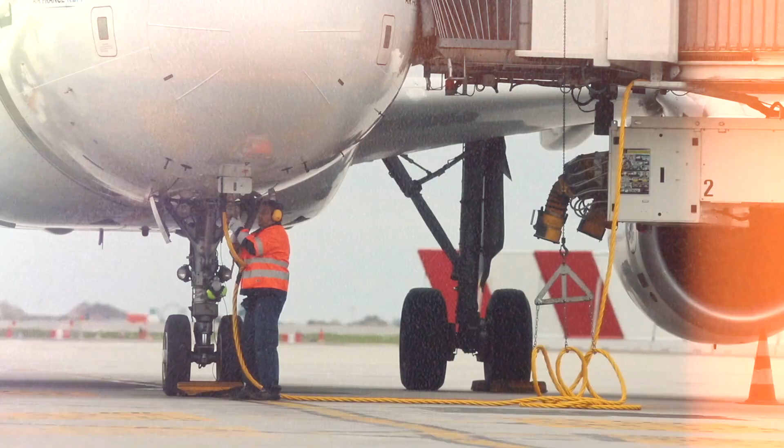Today, there is a rather urgent, double unsurvivable brewing crisis in the ever-evolving aviation industry. If these two serious problems are not resolved in the next 2 decades, the entire aviation industry would come to a halt and you can kiss flying anywhere bye-bye.

The first problem is the fact that planes' engines work on kerosene and there is only one clean, feasible alternative. Additionally, since kerosene is a crude oil byproduct, it is a major source of CO2 emissions, and the world is bound to run out of oil in less than 50 years.

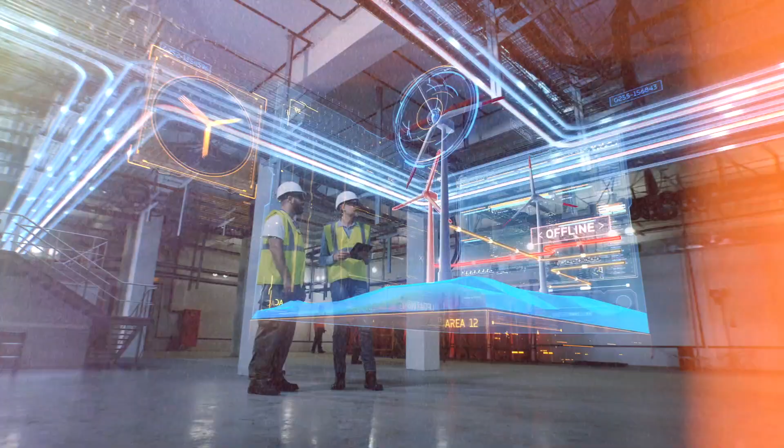This urgent matter called for an unprecedented giga project that extends across the globe to create an alternative, affordable, sustainable, clean source of energy to power passenger and cargo planes. What will save the day? Will it be batteries and solar panels on top of planes, or something more intriguing like green hydrogen? The answer will surprise even the experts.

The aviation industry currently supports nearly 90 million jobs worldwide, either directly within the industry or through the immense industry supply chain. Half of that number is associated with the tourism industry, which is immense and only possible due to the modern advancements in the aviation sector.

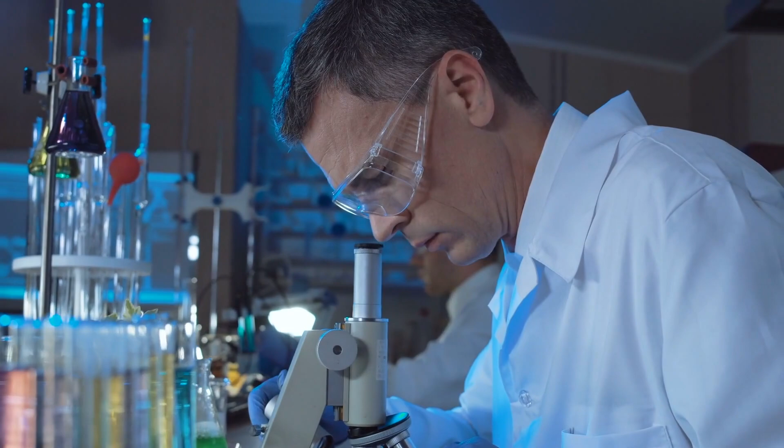And just like we have today green tourism, the aviation industry is also under immense pressure to become green too, since planes produce a little more than 3% of the total global CO2 emission among other pollutants. However, unlike the car industry, which is going electric, the aviation industry is the only sector on the planet that is bound to keep contributing and increasing greenhouse emissions and pollution in general because, as we explained earlier, there is only one alternative to kerosene and it is not batteries.

The reason for this dilemma is simple. Planes require large amounts of energy to take off and maintain speed. In a nutshell, to make a 100-passenger plane fly on batteries from LA to New York, the entire plane has to be filled with large batteries, leaving only space for the pilots. The situation is even worse for larger planes. So batteries are out of the question.

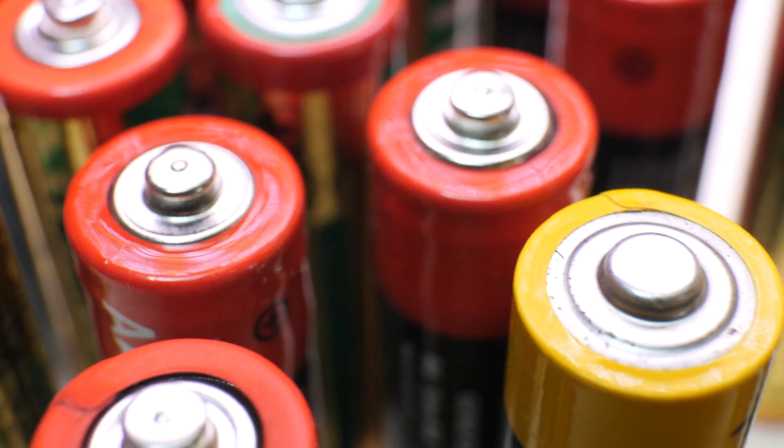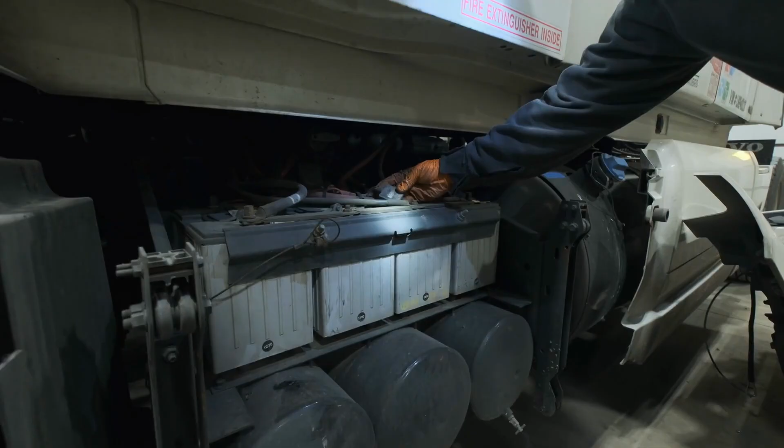Batteries, including next-generation ones, are simply unsuitable for planes. Even the flying cars and drone industries are struggling with that issue because effective batteries are simply big and quite heavy. The only real feasible and green solution is hydrogen, but there are issues there too.

The first issue has to do with the fact that hydrogen, which is the lightest element on the periodic table, actually takes up a lot of space. And as you already know, planes store fuel in the wings. It is a huge problem because the space needed in a hydrogen-powered plane is nearly 20 times larger than that in kerosene-powered planes. This would make planes with 400 passenger capacity able to accommodate only 150 passengers, which is simply a catastrophe for airlines.

The second issue actually lies with the solution for the first problem. Engineers did find a solution for the in-plane hydrogen storage problem and ways to reduce the needed space so that it is only about 3 times larger than space needed for kerosene. However, this solution requires storing hydrogen as a liquid at cryogenic temperatures, because the boiling point of hydrogen at 1 atmosphere pressure is negative 252.8 degrees Celsius.

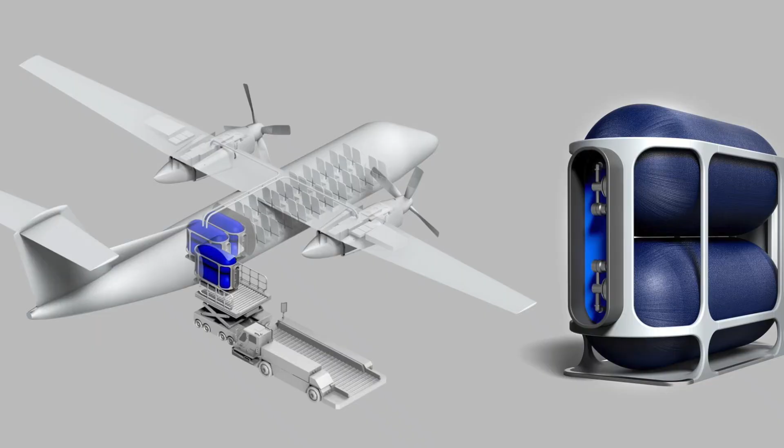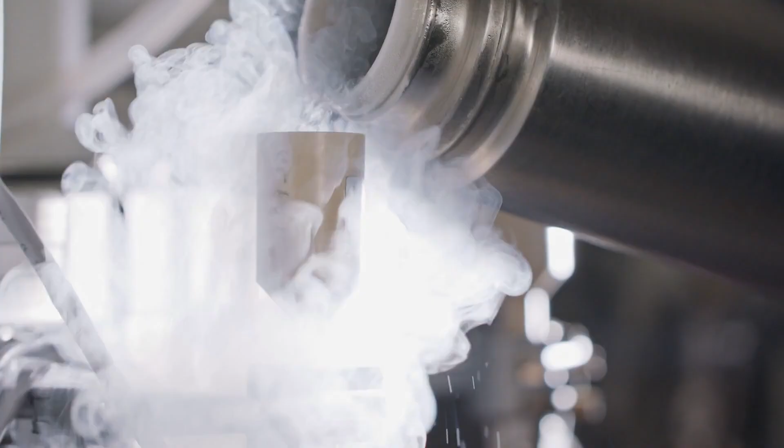So in simple words, in order to get hydrogen into a small enough volume to carry on board a plane, hydrogen will need to be cooled to cryogenic temperatures below negative 252 degrees Celsius or negative 423 Fahrenheit.

This naturally leads us to the third issue, which is a design problem, because designing these new modern systems and fitting them onto planes is simply very difficult, because the current global massive aviation industry and related supply chains must accommodate colossal changes to accommodate these new systems.

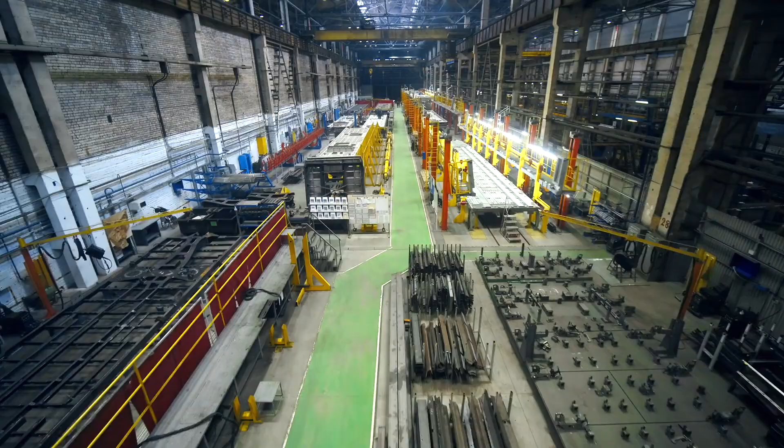The aviation industry is a truly monstrous global collection of mega projects, so you can imagine how hundreds of billions of dollars are needed to re-engineer the massive, endless manufacturing facilities, equipment, production lines, and you name it in order to make the engines and planes compatible with these new systems.

The fourth problem is made up of 2 parts. The first is the hydrogen fuel supply chain issue. Right now, most of the hydrogen produced every year is made using fossil fuels, which defeats the whole point of hydrogen as clean energy. The second part of this problem has to do with airports.

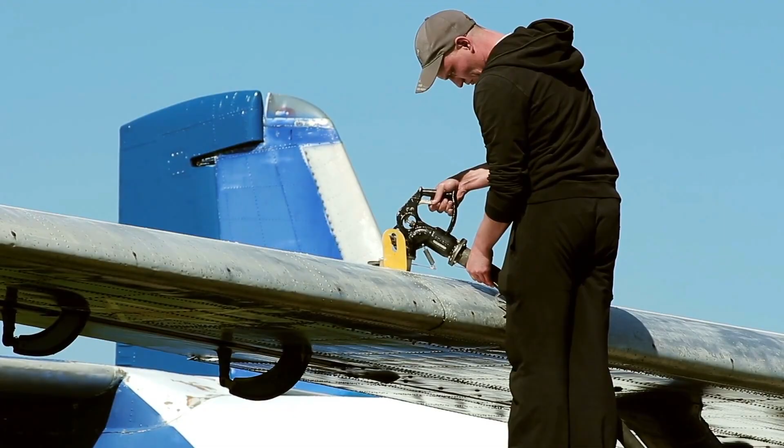Planes get fueled at airports via specialized tankers or underground lines. This entire infrastructure has to be upgraded and replaced. But guess what? No one wants to pay the bill because its estimated cost is around $250 billion.

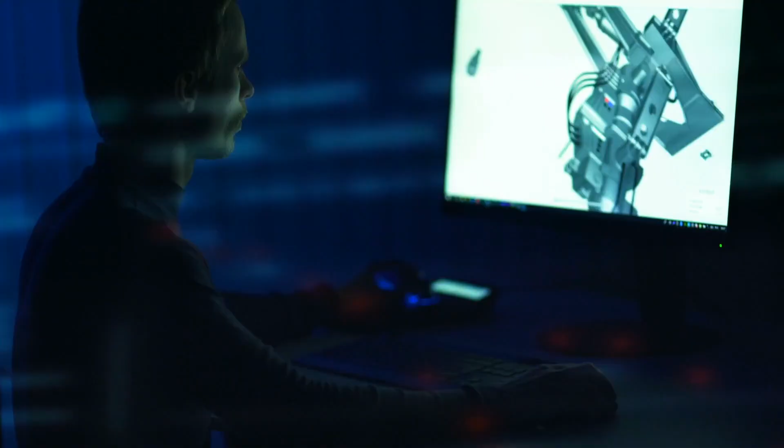Okay, that sounds like a lot of serious issues, but here is the thing. Recent breakthroughs are already creating mega projects that will solve all these problems. Let's now take a quick look at hydrogen, the solutions, and related ongoing mega projects. Hold on, we forgot to mention why hydrogen is the ultimate choice.

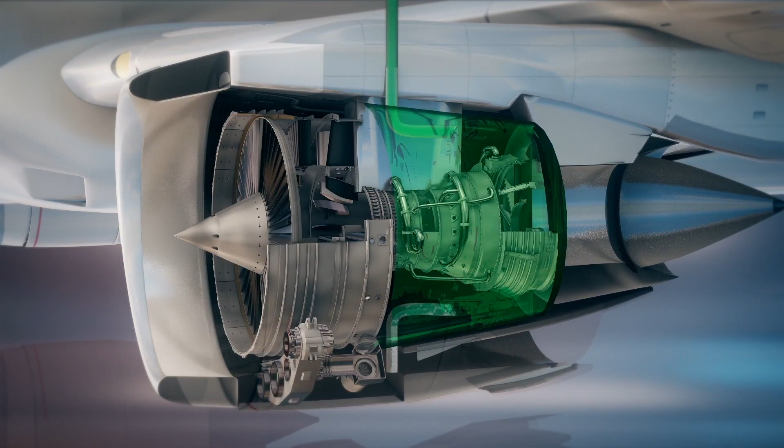It is simply a very versatile fuel for aviation because when it burns it produces mostly water vapor, and it can also be used in creating electricity within planes. It also produces more energy than kerosene during the burning process, which would make planes more efficient.

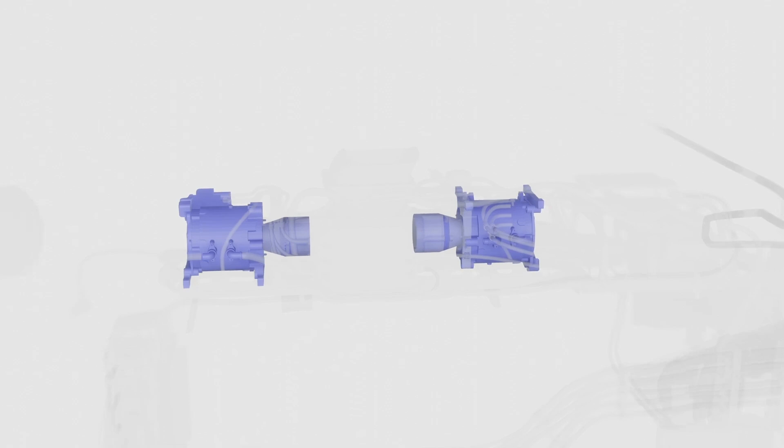This means planes can be propelled either by hydrogen combustion engines that emit mostly water vapor, or electric engines powered by hydrogen fuel cells, where chemical reactions generate electricity, which would eliminate the need for large batteries. In fact, such planes can have both systems where one engine is a hydrogen combustion engine and the other is electric.

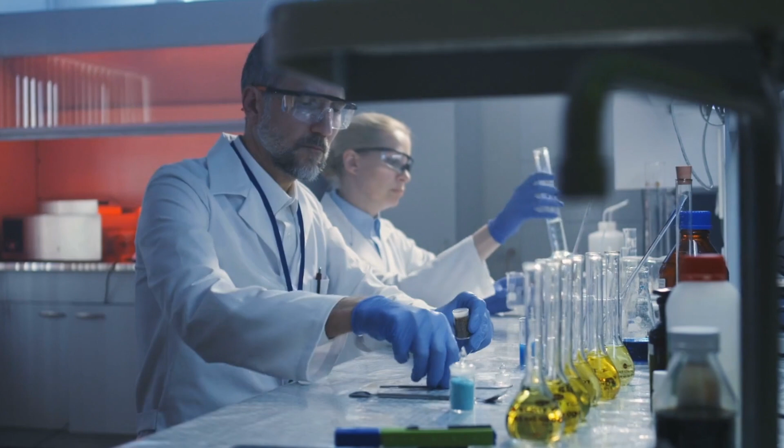The good news today is that many recent breakthroughs are setting the stage for a massive, gradual global transformation of the entire aviation industry. These solutions will make planes of all sizes environmentally friendly and even more efficient.

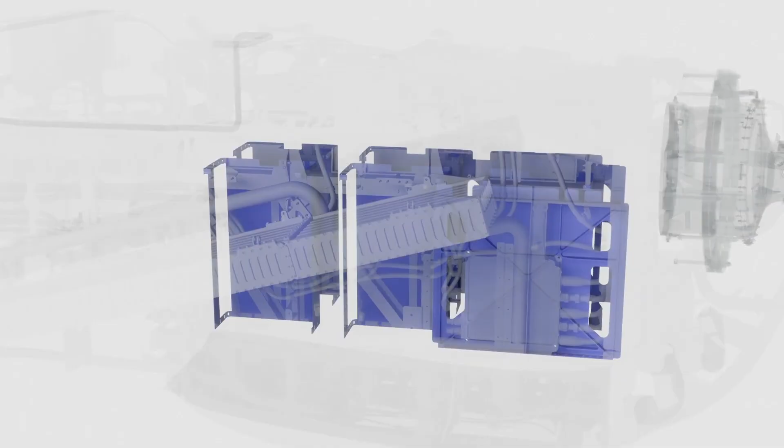The awesome thing about this breakthrough is in the details, because the company has solved a huge problem by developing an advanced, effective, and efficient hydrogen-based system called the high-temperature proton exchange membrane fuel cells that can be effectively used in large jumbo jets. To keep the science simple for you, in aviation, more heat and pressure equals better air cooling and reduced cooling drag.

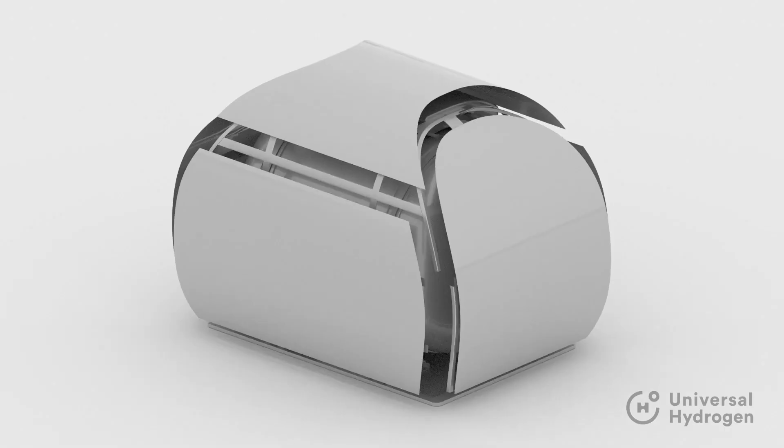Another firm called Universal Hydrogen is also up to something quite huge. This firm has provided a solution for fueling problems at airports by building a flexible, scalable, and capital-light approach to hydrogen logistics by transporting it in modular capsules over the existing freight network from green production sites to airports around the world.

These small modules can be easily stored at airports and loaded directly into the aircraft using existing cargo handling equipment, which would eliminate the need for new costly fueling infrastructure. The firm has also developed conversion kits to retrofit the existing fleets with a hydrogen fuel cell powertrain. A few months back, the firm successfully tested a retrofitted Bombardier Dash 8-300.

As exciting as the work of these firms, among others, is, they are nothing next to the ongoing initiatives by the multinational giant Airbus, which is investing quite heavily in a program to test out hydrogen combustion engines.

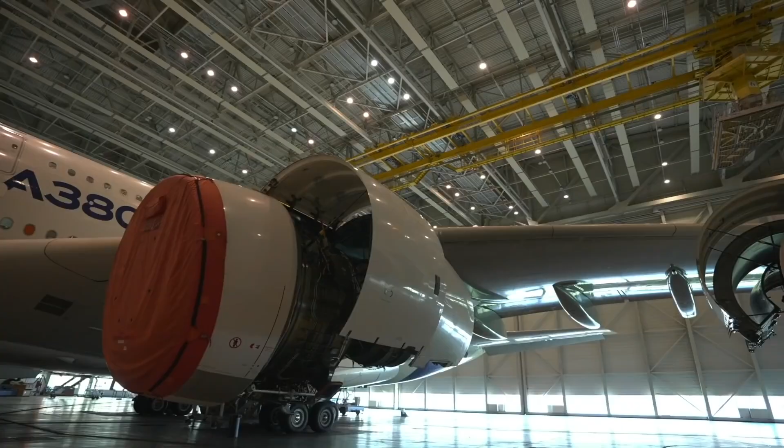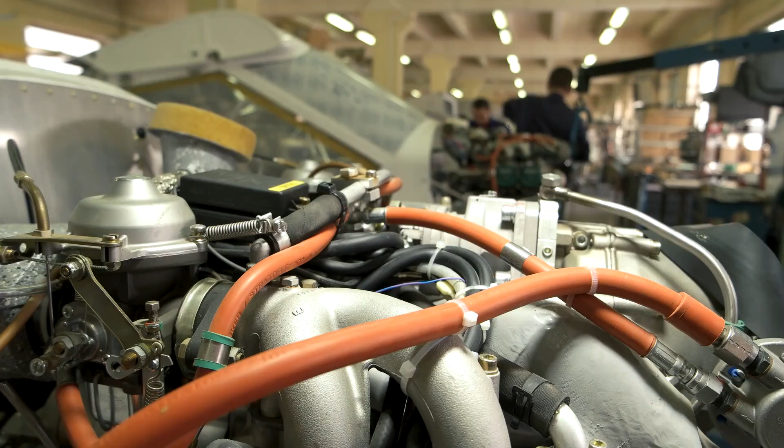Right now, Airbus is overhauling an A380 airliner, which by the way is the largest in the world, by adding an additional hydrogen combustion engine to the outside of the plane and installing monitoring equipment. With the changes, the company will be able to test hydrogen-powered flights in real-world conditions. Airbus plans to produce an engine that is compatible with the current A380 and A350 systems, and designs that would not require heavy modifications to the planes.

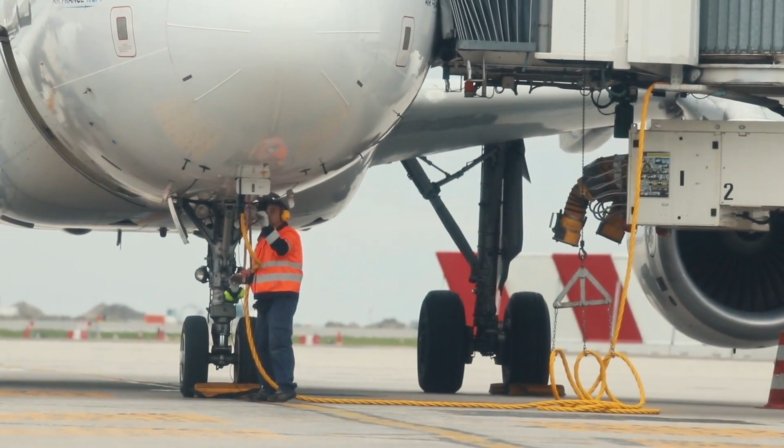In late 2022, Airbus also undertook a feasibility study for establishing a hydrogen hub at Singapore's Changi Airport, alongside the Civil Aviation Authority of Singapore and industrial gas company Linde. Airbus has also entered a memorandum of understanding with SEA, the company that manages Milano Linate and Milano Malpensa airports, to study and execute projects for the distribution of hydrogen at Milan's airports.

This leaves us with one question. Are there ongoing mega-projects to produce more hydrogen without creating pollution to meet the rising demand? The answer is yes, because hydrogen is also increasingly being used in the car and electricity generation industries and counting. Not to mention, it is bound to become cheaper than common fossil fuels by 2025.

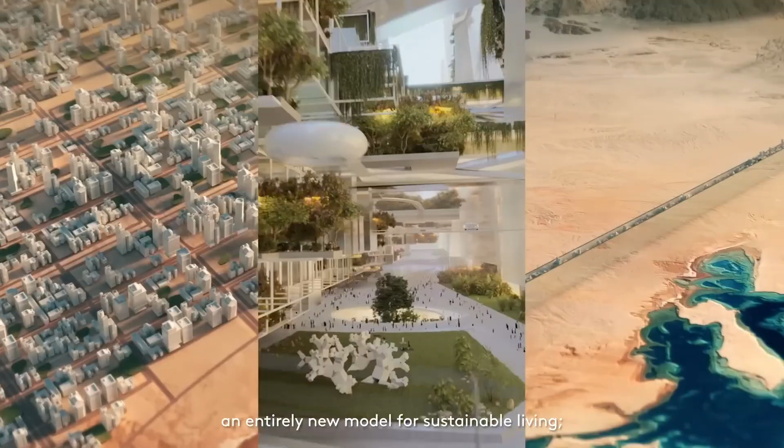Saudi Arabia is already advancing in this sector with the NEOM Helios Green Fuel Project, which is a $5 billion under-construction facility for the production of green hydrogen-based ammonia for easy global transportation.

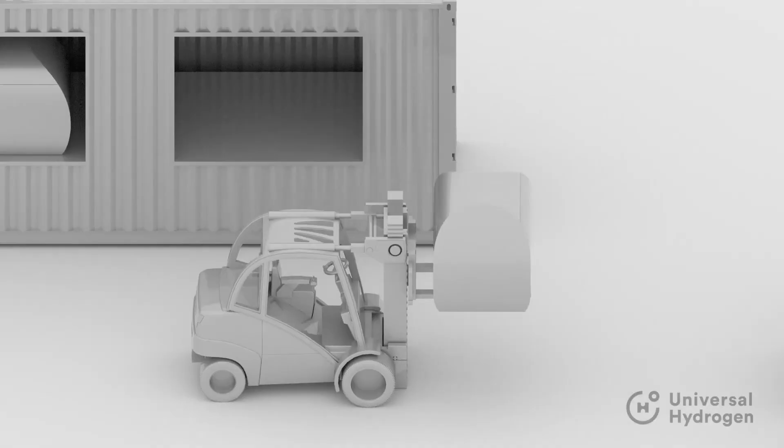Africa is also leading the way in developing large-scale green hydrogen projects, such as Mauritania's AMAN and Nour electrolyzer green hydrogen mega-projects. Other similar projects are located in Namibia, South Africa, Egypt, Morocco, and Djibouti. This network of green hydrogen power mega-projects is turning Africa and the Middle East into the future top supplier of green hydrogen for the car and aviation industries.

What do you think about this global green hydrogen madness? Will hydrogen-powered planes fill the skies in the next decade? Will the world witness a revolution in the aviation industry with shocking disruptive innovations?